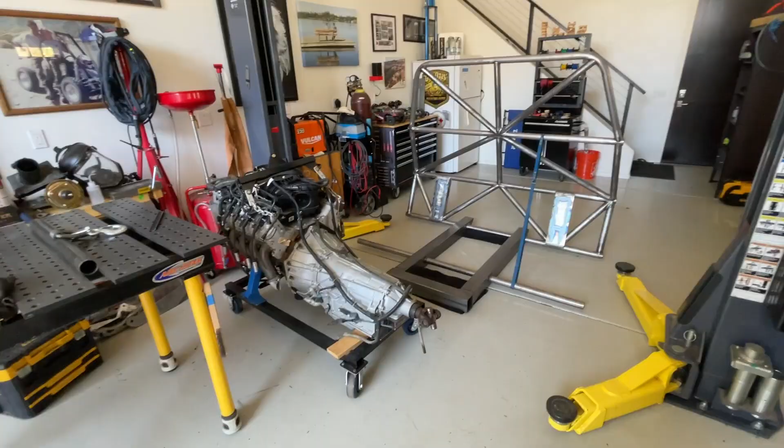All right, where to start with this conversation? I guess we'll just start with first the engine. And the trick, I think a lot of times, is just figuring out how are you gonna lift one of these engines. And so I'm constantly designing different things just to lift the engines. And you'll see in some of our previous videos, I take the exhaust manifolds off and I bolt some plates up to the side, and then these chains mount to the center.

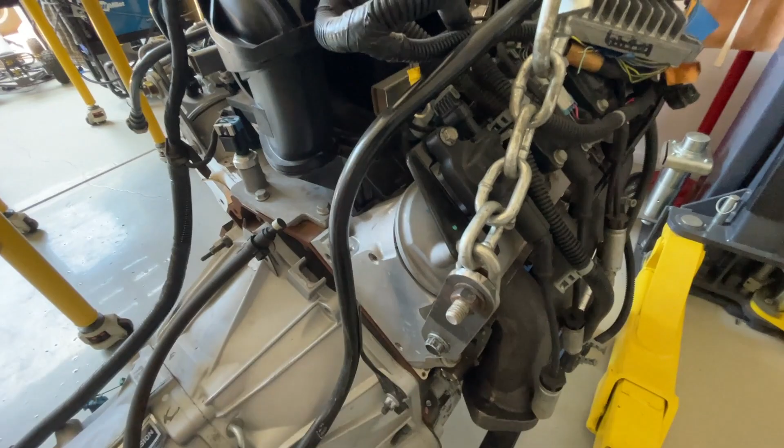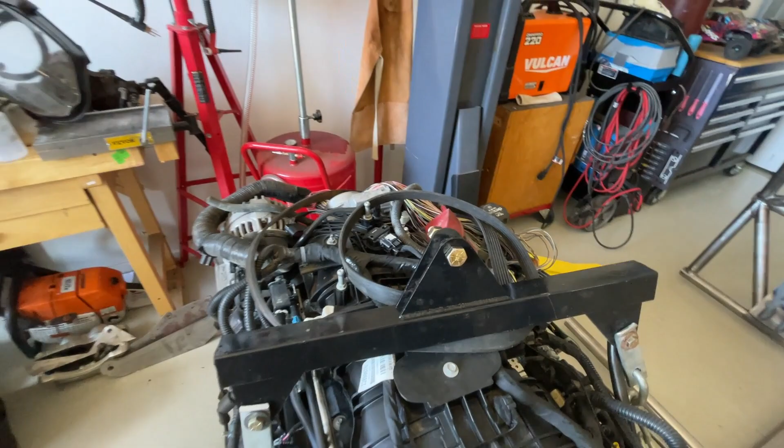But today, I'm trying to leave those exhaust manifolds on to see if I can later on. And then I just got it mounted up a little bit differently with some pieces that I cut off the CrossFire XR. These are 1/4" plate bolted on the sides of the heads. Now, those chains go up to this bar that I made a while ago. And to basically now connect that whole system onto what I'm gonna be using to lift it, which is my lift here, I'm gonna make this bar to go across the arms of the lift.

And these are just some scrap pieces I had in a bin that I'll be using to make that, and there'll be a lift. And this thing will connect onto there to lift the full engine. And I'll use both arms basically to balance and level the engine. You'll kind of see how I do that. I'll be using that to set the engine into the cradle and then dimension everything to make the engine mounts.

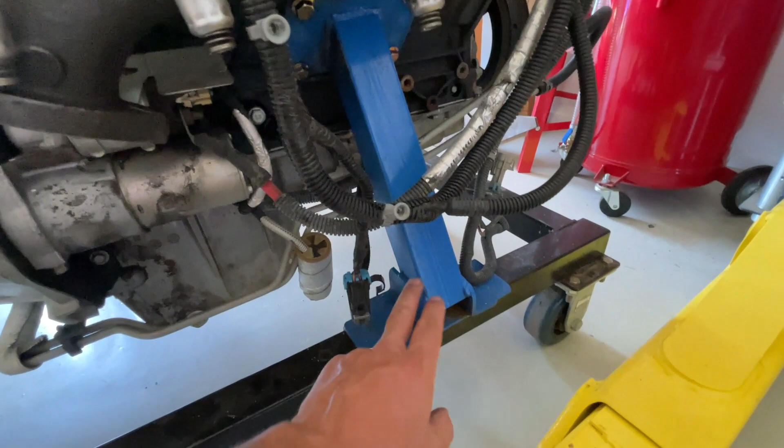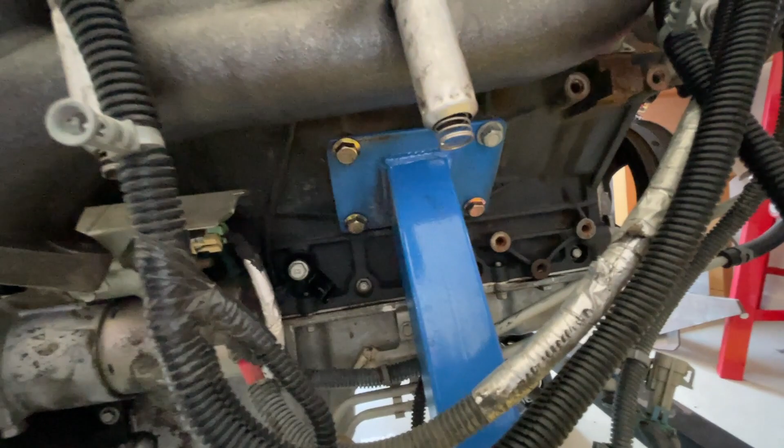Let's take a look at what kind of engine mounts we'll be using. You kind of get a little sneak peek of what we're doing in the rear for the transmission mount. But the engine mount, which we're talking about today, will look kind of like this Frankenstein engine mount right here. It'll come down to the cradle frame, and then it'll go up to bolt to the side of the engine like all LS engines have. And I'm pretty sure that's a pretty standard bolt pattern. I'm gonna pull more accurate dimensions off of that, and we'll make another one of those.

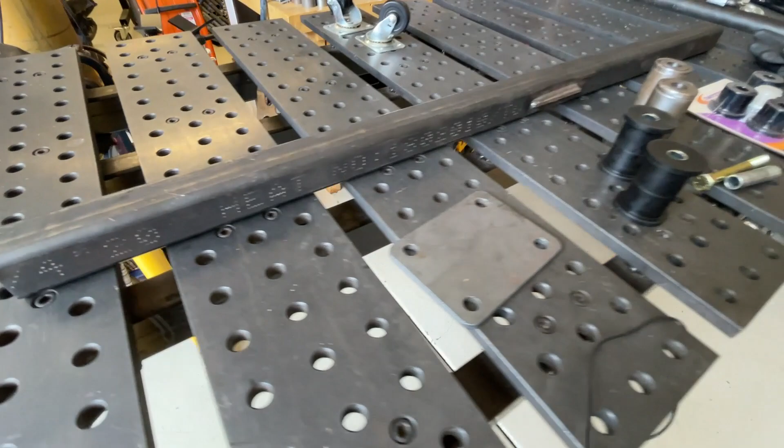But what I find is that a lot of the stresses kind of go on where that plate mounts to the side of the engines. The bolts can take it, but I have sheared off the weld all the way around. I've used a little bit thinner material. This time we're using 1/4" plate, and the upright we're going to be using will be a 2" square with a 1/4" wall. And that'll be pretty robust on the engine side.

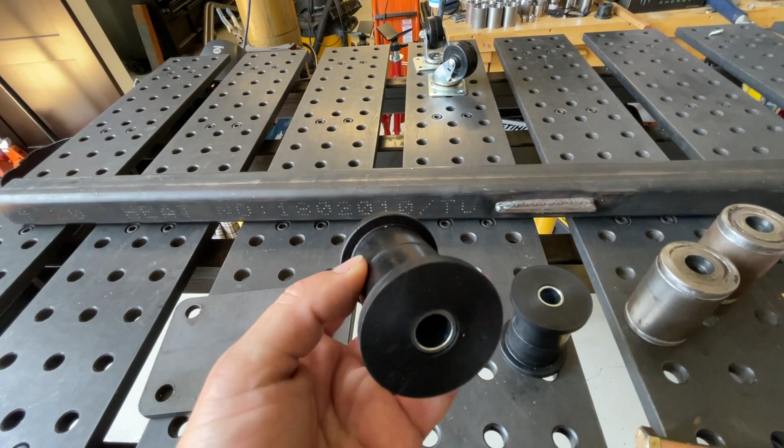And then on the frame side, we're going to be using these bushings. So there'll be a little bit of give, not necessarily as much stress on the frame side. I get these bushings, they're just '67 to '87 shackle bushings from a Suburban. And there's the part number if you're interested in something like that.

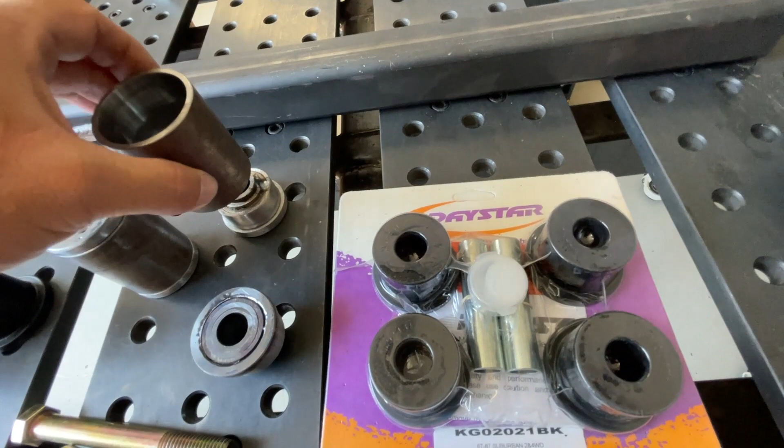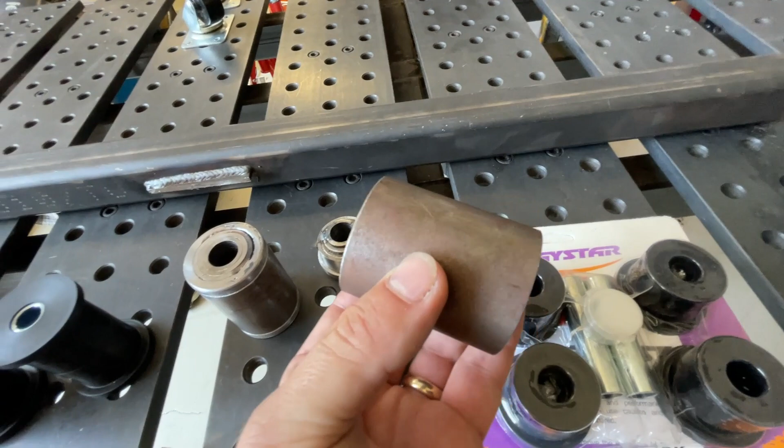And what I like about that is we just continue using the DOM that we use for the rest of the truck, the 2" 120 wall DOM, and that's what those things will sleeve inside. In the past, when I've made these, I kind of put the bushings inside the piece of DOM that I have, and then as I'm welding it, I've got to do some tack welds and then really quickly try to cool that thing down because it'll start melting the rubber that we're using for that.

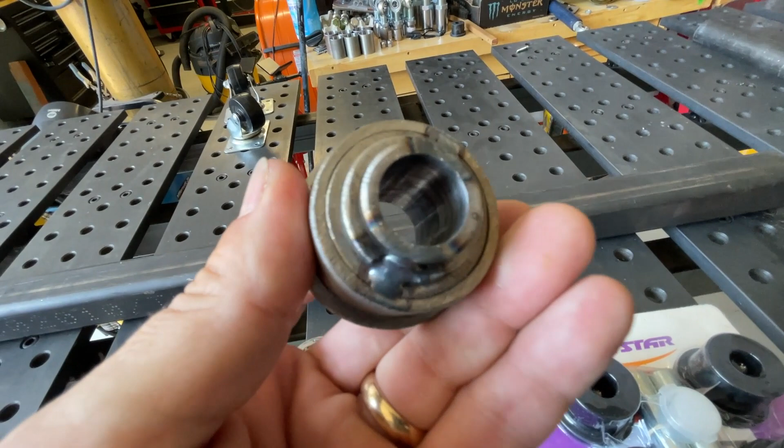So what I made, I don't have a really cool lathe or anything like that, but I had a bunch of extra tubes sitting around, so I was able to make these slugs, I think we call these things, just basically from sleeving tubes inside of each other until I get the right size. And so those go in there, and now when I'm welding, they won't melt.

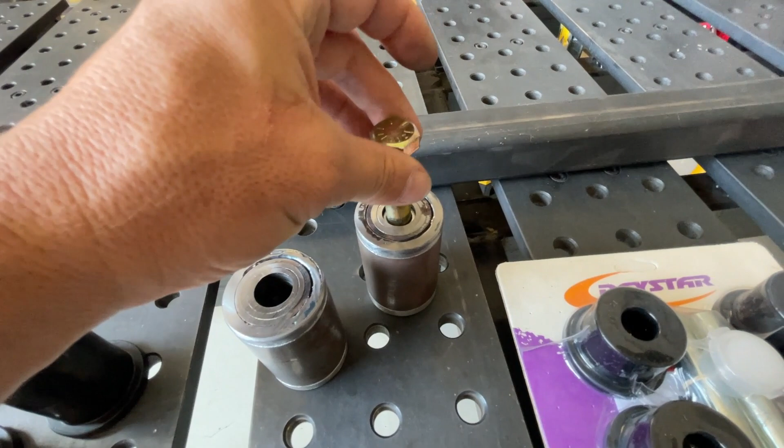And then inside that goes the sleeve, which is this sleeve right here, will go in there, and then I can put my 9/16" bolt all the way through there. And I can basically mock it all together, weld it completely before I take it apart. And that makes that really handy.

So anyway, let's go ahead. I'm gonna put this thing on time lapse and you can see me making that mount and then trying to get this engine into the cradle. Let's get to it.

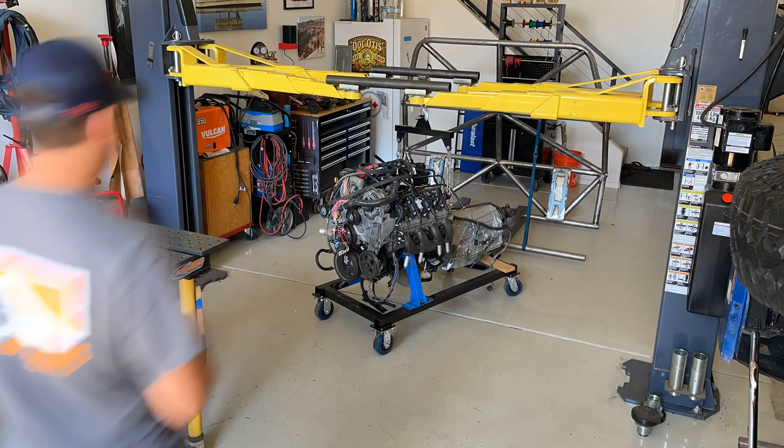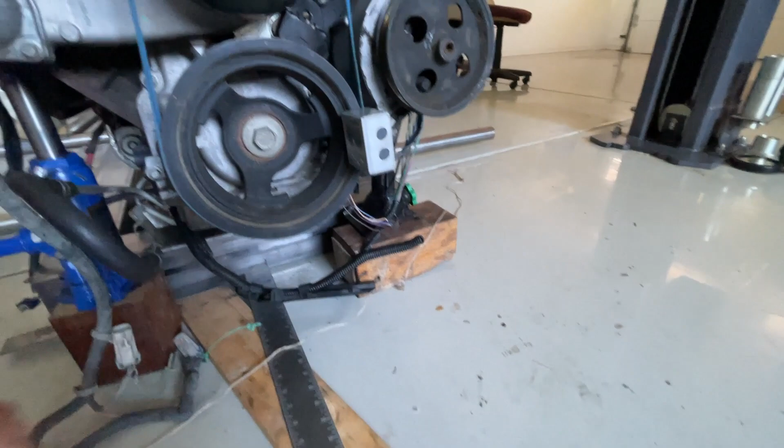All right, here is the engine in the cradle, and I think it went in perfectly, pretty happy with it. Let me show you some of the high-tech tools that I'm using to get it all lined up. So I got this square lined up with the center of the cradle, and basically to align the engine up in the center, I'm just taking the plumb bob off the water pump and through the crank there, and it's lining it up on that, and it's pretty darn close there.

And then as far as getting the engine level left and right, I haven't found really a much better way other than to put my little angle cube back here on the valley cover, and there you go, within 3/10 of a degree. And then as far as front to back longitudinally, kind of 5 degrees is what we use on Honcho, and that's pretty close there to 5 degrees is how much the engine is tilting down at the tail.

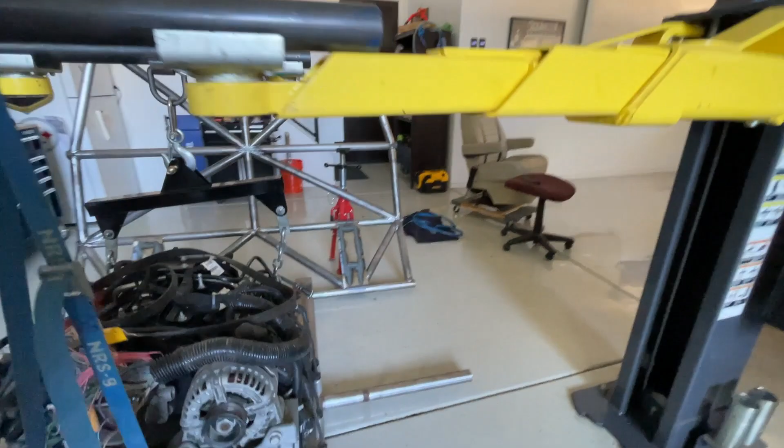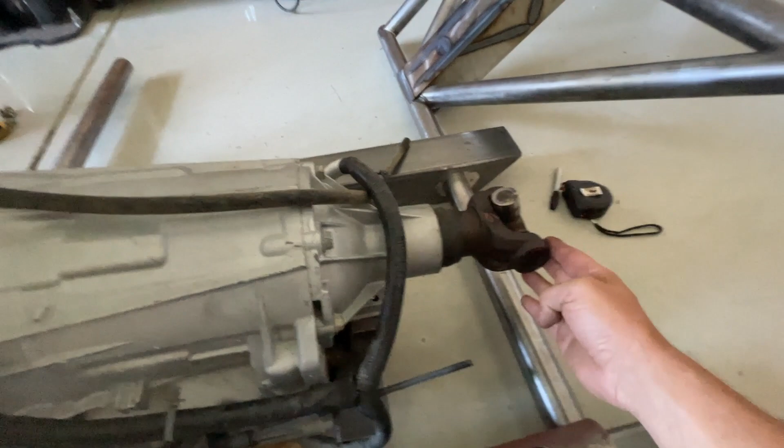Now, why do I do that? The reason I do that is because, people will scoff, but we've raced already twice at the Baja 1000, haven't blown one of these up in Honcho, but we're still using a slip yoke on this thing. And then there's only just so much travel that you get out of these U-joints.

This will not be the one that we use. We're gonna have the guys over at Oceanside Driveline build us a new drive shaft. So these won't be the ones we use, but this is the hardware. This is basically the equipment that we do use. And there's a limit to how many degrees it'll go up and down.

So this will basically allow our drive shaft to go 10 degrees down and then be at the 0 point. Because usually our limiting factor as far as where we strap our suspension in the back is how far these U-joints can handle going down. So anyway, you kind of get an idea of the setup.

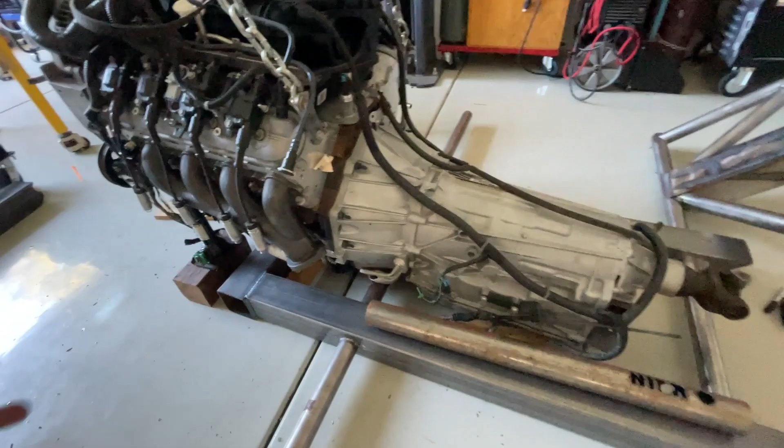What we have here, we're gonna have the exhaust. Where we had it before, we had it kind of coming out and going all around the side of the car. Now we're gonna have it going down and going inside the cradle there. And then the other side, we'll have our coolant lines going down the cradle also with the exhaust. So we'll be dealing with some heat issues.

We'll see, there might be a shield on both sides there for the driver and the passenger, and then also for the transmission, but there's plenty of room in there. I mean, it's a huge vehicle compared to Honcho in every respect. It's got so much more room. So I don't think we're gonna run out of space.

So, all right, now that we have it in there, let's talk about what these engine mounts are gonna look like. First, let's take a look at Honcho's. All right, we're looking underneath Honcho now. And what you see is here's that same 1/4 inch, 2-inch square tube there. Kind of goes all the same hardware.

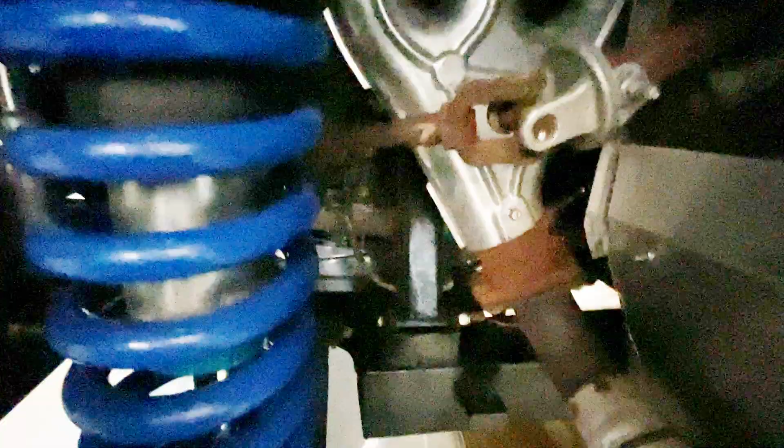But what you'll notice here, which I'm gonna change on this one, is that this perch just really isn't that tall. And what that makes happen is the actual shaft here that becomes the engine mount, I'm not sure what you want to call that, but the actual piece there is long, which means that over a long distance, you can create a lot of moment arm. With that in mind, let's go ahead and take a look at Lefty.

All right, so I bolted that plate in there, and as it turns out, that plate, which I didn't think was gonna fit perfect, it fit perfect. I'm just gonna cut another one of these out on the plasma table and be good with that.

But you can see the distance here is probably 12 inches from that plate to here. And I'm gonna probably bring this up about 4 inches just to make that distance that the rotating piece there of the engine mount has gotta be shorter. And that will reduce the moment arm.

And just like putting in the 1/4 inch plate will be another way to lessen the likelihood of that thing breaking. And then also making a more robust transmission mount is also going to help with that. I think that we will not have any problems with mounting this thing.

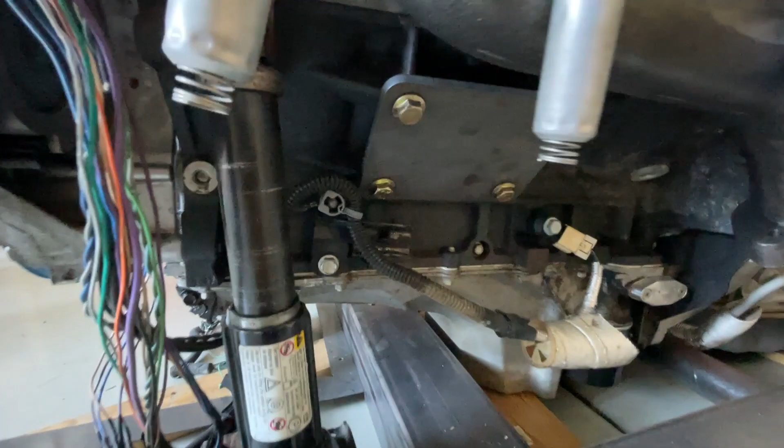So with that, let's go ahead and start building this piece right here, which will be the frame side perch for the engine mount. And then we'll figure out how to connect those things together with some of that 2-inch square tube. Okay, here we go. Dave's brain on Fusion 360. Let's start with some sketching. And big picture, I think I'm going to make the perch about 3 inches above the base is where I'm going to start with. So we'll make the base first, and then we'll make the other parts later on.

So I'm just going to work right off of the center, and I'm going to start with the hole. I'm going to say hotkey C, which will give me a center circle. And the bolt diameter, it's a 9/16, and it's about a 0.55 inch or somewhere in there. So I'm going to go 0.56 inches. All right, and then now how big in the radius around that, I'm going to say hotkey C again, and I'm just going to say this thing's going to be 2 inches.

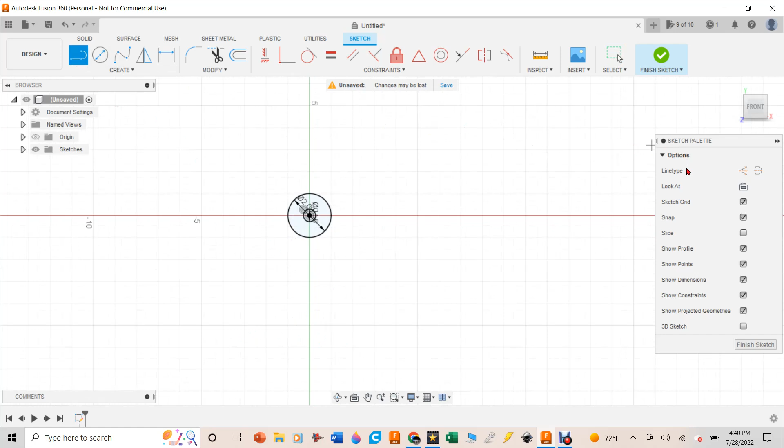That's the same size as the whole thing that's going in there, so it just makes kind of sense to me to do that. It'll also make sure that it always fits in there as I make the other parts here. So from there, the base of it, how wide do we want the base? Well, remember we said we want it 3 inches from the bottom. So I'm going to turn on construction lines. Anytime you use construction lines, it draws a line, but when you go to cut, it's never going to try to cut that line. So we'll say this thing's going to be 3 inches tall.

And then the base, let's just make it no more than any of the dimensions anywhere. 3.5 is kind of like the weldable flat space on any 4x4" tube, which is going on. But I think if we just go with 3, we're not getting excessive. So I'm going to say hotkey L, which gives me a line. I'm going to turn construction lines off, and then I'm going to go over here. I'm going to make a 3-inch line.

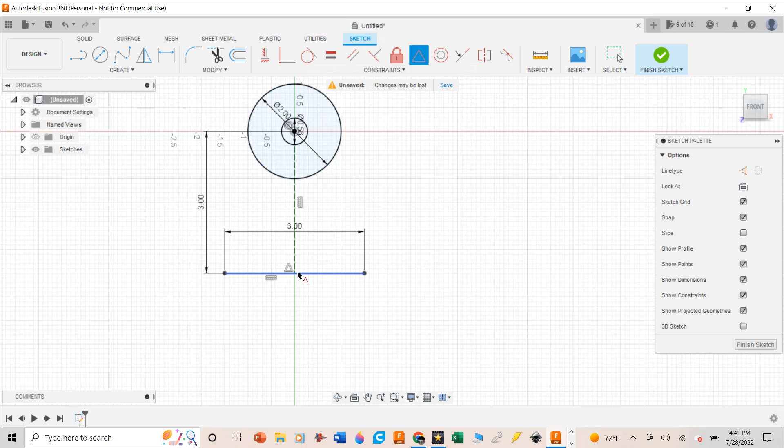And I want it to be centered on that point because I want it to be pretty much symmetrical. So I'm going to say midpoint. I'm going to make that point right there centered on that point. Now that's a constraint that's in there. From there, I'm going to hit hotkey L again. I'm going to go from this point down here until it snaps to where you see that little symbol up there telling you that it's tangential. And then it'll be a smooth arc going in there. Boom. And then from there, I'm going to remove the sides.

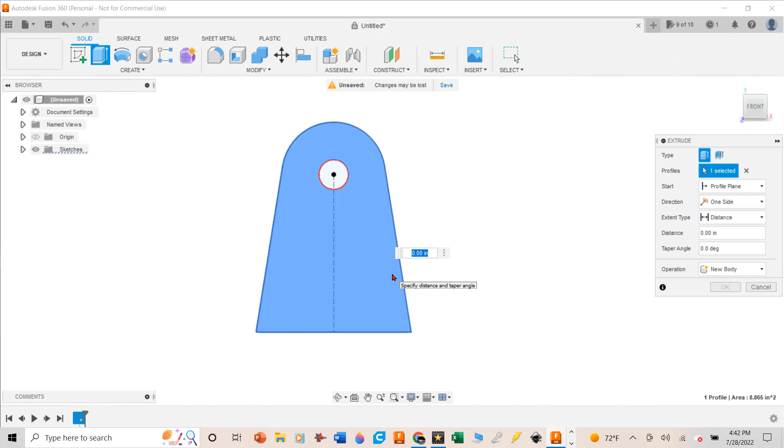And that's the perch. That's where it's going to be mounted to. That's the thing that's going to be sticking up on the side. Now I want to support that, so I'm going to box this thing in. So I'm going to put some plates down the side just as a box. Now, I need to make 2 of these. I'm going to actually extrude this part right now. And say hotkey for extrusion and 0.1875. I think that makes a piece that is 3/16, which we'll be cutting into. So there we go. There's one of those.

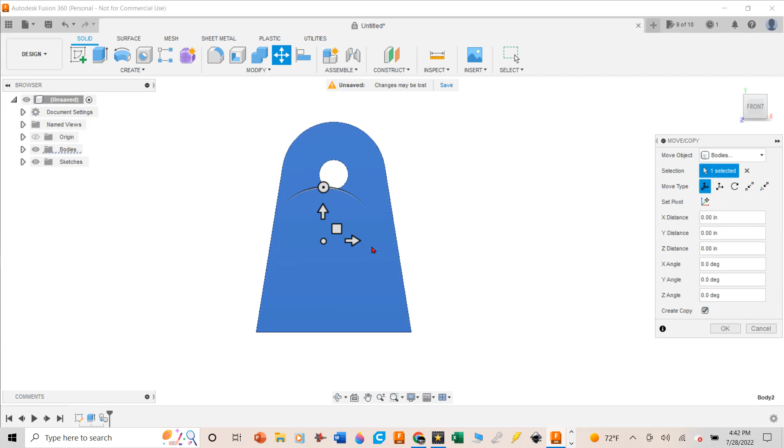And for each side, I need 2. But I will just say move. I'm going to say bodies. Click that. I'm going to create a copy. And I need to make 2 of these. And since I'm going to nest these things later, I might as well start now. Flip it 180 degrees. And then when I go to cut it, I'll just do like that. There we go. Now those 2 pieces are ready to be cut. Now I want to put some plates on the side, like I said, to box this thing in. The full width from inside to inside is 4 inches wide. These plates will go up the side. So I'm going to say sketch.

I'm going to sketch on this plane again. I'm going to use this piece just to kind of measure how long that thing I got to make is. And I don't want to go all the way to the end of the hole just because it will kind of interfere with being able to drop this thing in there. So right about there is probably good. And it'll give you enough structural rigidity, I think, for this thing. It looks like a 2.5 inch.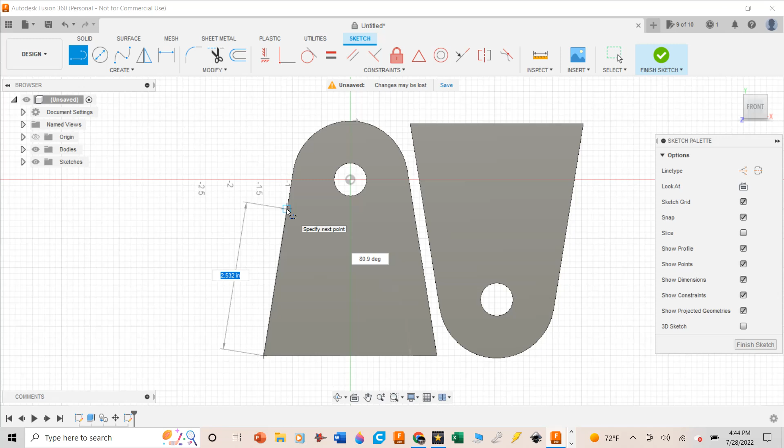So I'm gonna go over here now and make a rectangle. And I'm gonna make that rectangle 2.5 by 4 inches. And let me just make that 2.5 tab 4 just so it makes a little more sense what I'm doing. Now that's the piece that's going to basically weld down the side, and that'll just basically give it some rigidity.

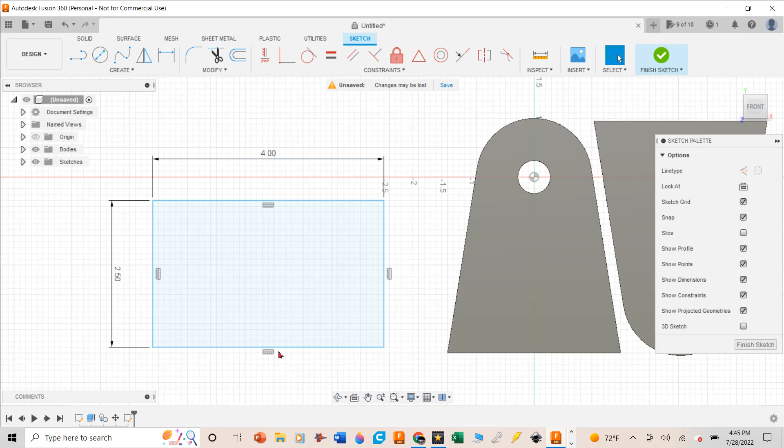But remember, this part is going to be open, so every time you wash, this thing's going to fill up with water. So I kind of need to make a relief right here just so that water can kind of flow out of this thing. So that grabbed the center point, if you could see that. I'll make that a 1-inch circle, and then I'm going to trim all these parts of the circle. And then I can kind of go in here and make a radius on both sides just to kind of soften that up, make it look like you knew what you're doing. And say enter on that.

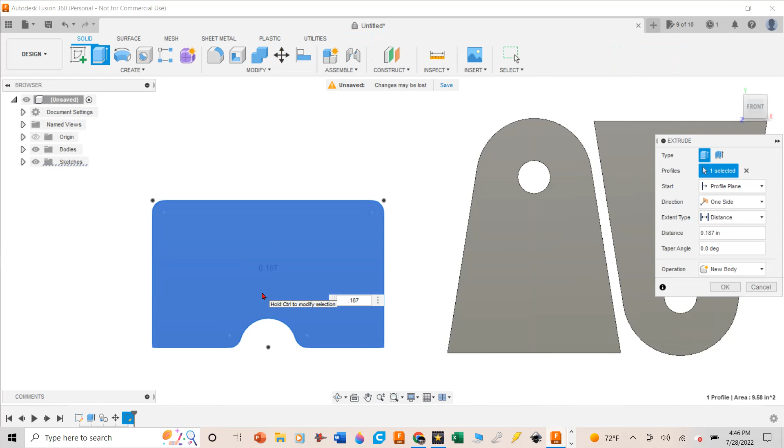And I can probably do also this. These parts will weld down to the base, but I'm going to do, I didn't want to do that. Control Z, I'm going to make a radius there and there. I want that to be, yeah, that looks about right. Just so it looks nice and clean. There, cool. That's how that will look. And I'm going to say enter on those. I'm going to extrude that and extrude that. And that's going to be 0.1875 or 3/16.

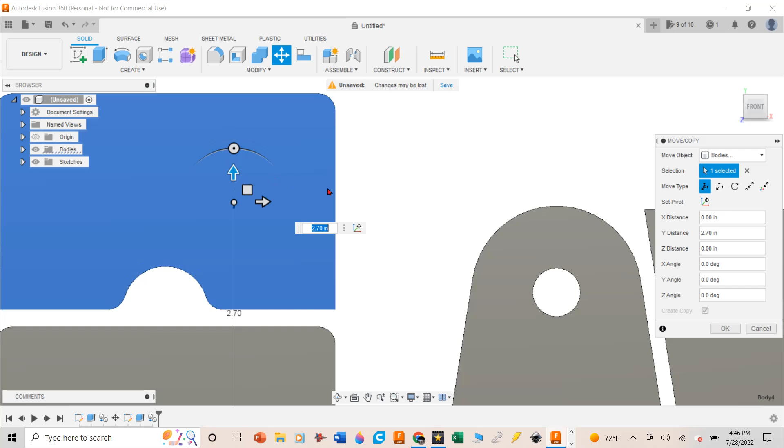And I need to create a copy of that. So I need 2 of these. And it looks like maybe just up here would be just as good. Sometimes you got to scroll in, otherwise it'll be moving by 1/2 inches at a time, and you don't want it to do that because it wastes a lot. So if you scroll in, it'll allow you to move it at a lower increment, if you will. So there we go. All right, so this is like the sides. These are the braces on the front and the back.

And the last piece is, I kind of want to take the place where those 2 4x4s join, and I want to strengthen that a little bit. Then also give these things a base to basically allow me to weld to. So I'm going to make another part right here, and I'm just totally freestyle on this. I'm going to start drawing. And first thing, I'm going to use just some construction lines. So I'm going to turn construction lines on. And the way that mine goes together, if I have a rectangle, and just say that's 4 inches wide by, it doesn't matter how long, this is longitudinally front to back on the car.

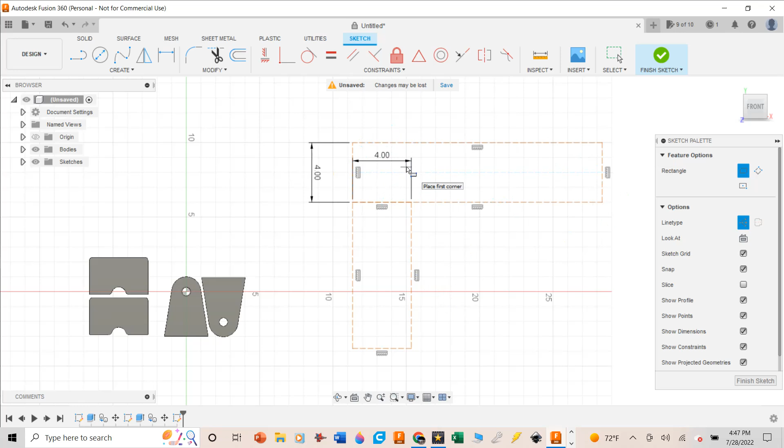And then I'm going to hit hotkey R again. I'm going to start here. And then now it's 4 inches tall, tab, that's going to be 4. And then this is going to be somewhere underneath the engine is where that ends. And that's what this thing's going to look like, as far as this plate over here is going to sit on top of this one. And then now what I want to do is I got to keep everything about a 1/4 inch away from the sides over here. And I can kind of illustrate that.

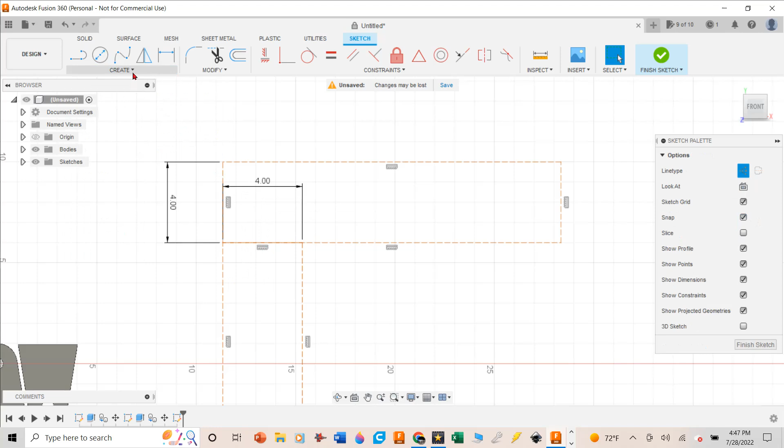I can also go pick a center rectangle again, and then it'll snap to the center point, and I could just, that's not what I wanted. I want a center rectangle. I use this one all the time. I find these really handy. Snaps to the center, and then I could just say that the width is 3.5, and then there it goes about to there. And then maybe that helps me figure out how close I want to draw the next lines.

I could do the same thing over here and say tab 3.5. You just got to kind of keep track of what you want. So I wouldn't want the thing I'm going to make to exceed these lines necessarily, just because this is going to be the area where I'm going to weld around the sides.

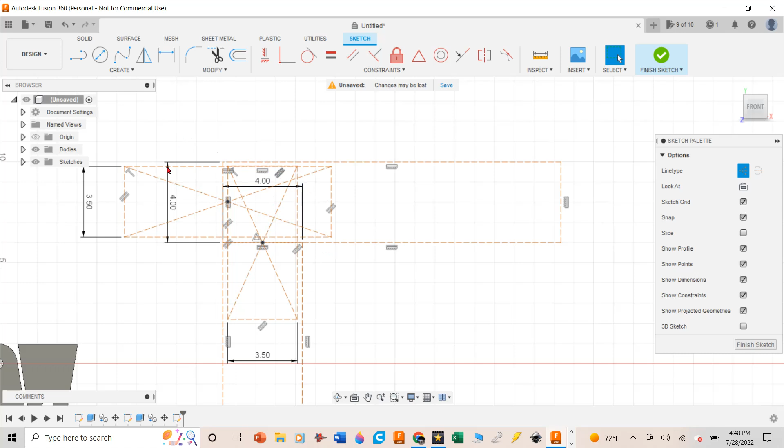I'm also going to give myself some places to do some rosette welds to really strengthen this thing and lock it into the top of these pieces of metal. So I basically want to make kind of like an L bracket. I might have it come all the way down here, give myself a little room to weld to, and then weld from underneath. That'll give me a perch to put this other part.

So we know that this piece right here is going to be 4 inches by about 3 inches, right? So if we take our square and say rectangle, it's going to be probably right about here, give or take. I'm going to say it's going to be in that direction, at 3.5-ish. It actually will end up being by 4.

Now that's going to be like the base of this rectangle, this one right here. It's kind of getting hard to keep track of where they are, so I got to build a plate that is bigger than that. I can come in here and just start making some lines, make it up here, come out to over here, and then maybe come into right about there, across this line. I don't know why I'm doing this, but I need to make these not construction lines, otherwise it'll never cut them.

Making this big enough over here will give me some room to move that piece around. This will be a little bit of space to weld across on the top. I'll get a good weld all across here, and then all the way over to there. Now you can kind of see this plate right here represents the engine mount, and I can move it all around here once I get this other plate on top.

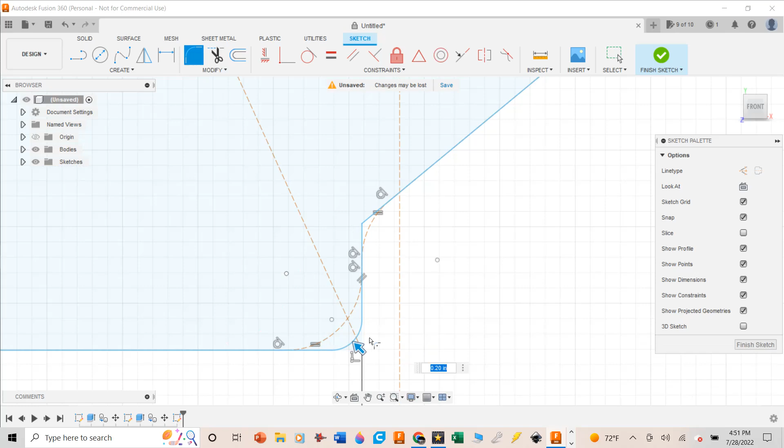Once I got this, we can just try to make it look like we knew what we were doing, which half the time I can't say I do, I'm just making it up. We can just kind of soften all the lines. I don't want that. I want to grab this, grab that. No, not that line. All right.

So I have that there, and now what I can do, if I want to, is put some circles in here that I can rosette weld, just to really tie these things together real well.

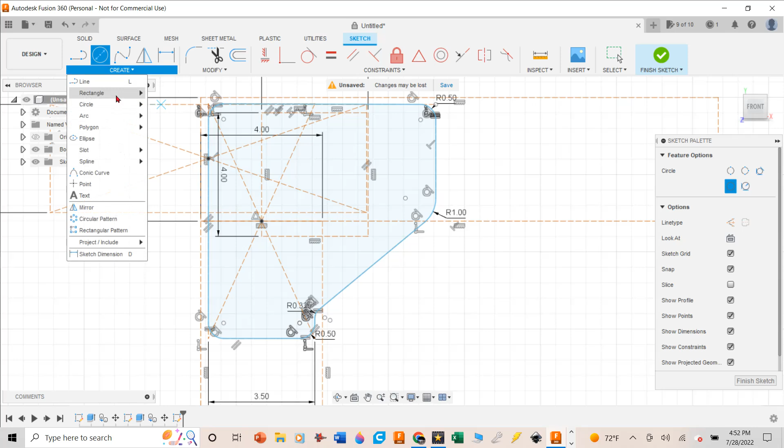For lack of a better plan, try to make it look good, I guess. I can go. You're going to do it. Might as well do it right. Center rectangle, I'll go from the center here. Escape.

All right, that should tie everything together. I got a weld down there, and I got a couple of rosettes. That's going to make a really strong corner there.

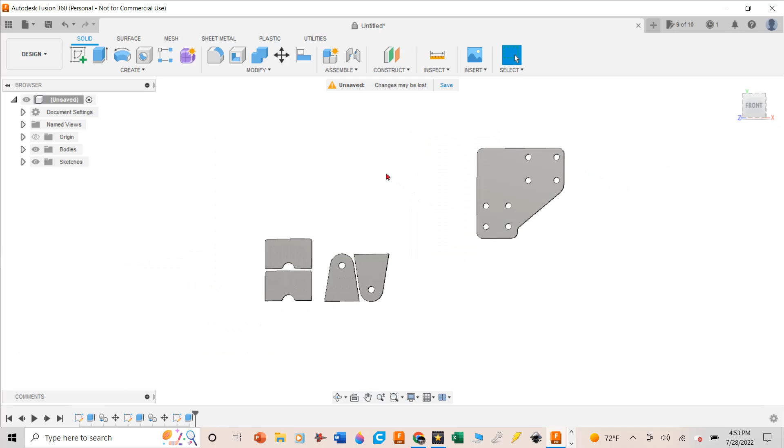I'm going to hit hotkey E, I'm going to grab this thing, it all looks the way I want it to look. 0.18875 — I don't know, that might not be what 3/16 is. It really doesn't matter at the end of the day.

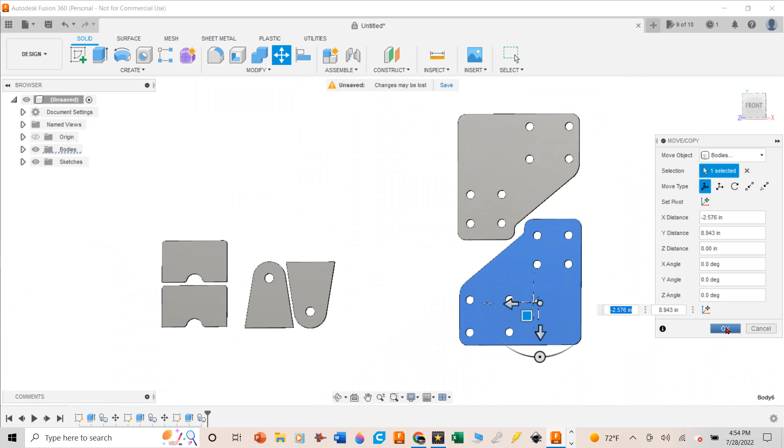All right, so there's that corner piece. So I'm going to cut all these pieces out. I'm going to move this one and make a copy, rotate it again 180, and I'll just put it right here. Looks like the best way to nest that.

All right, now we can go ahead and manufacture. So these things, I'm going to make into 3 separate files when I go to manufacture, so I can move them around and see pieces I have left on the sheet. But this is, I think, a pretty good way to nest these things.

I'm going to go to setup, I'm going to say select. I'm only going to select the pieces that I want to cut in my first setup, and I will call these supports — support plates. Okay, and now I'm going to go to the cutting.

So I use the Razor Weld 45, and I love the thing. I've been using it for like, I guess, 2 years now. That's how long I've been using Razor Weld 45s. And I said for a long time, as soon as I am let down by the Razor Weld 45, I'm going to get a Hypertherm.

Never happened. So I'm going to do a lead in, let's call it 45, and let's do a lead out — making numbers up here — 65. I want it to go lead in slow, cut at 55 inches per minute, and whip itself out at about 65. I think that should work out pretty good.

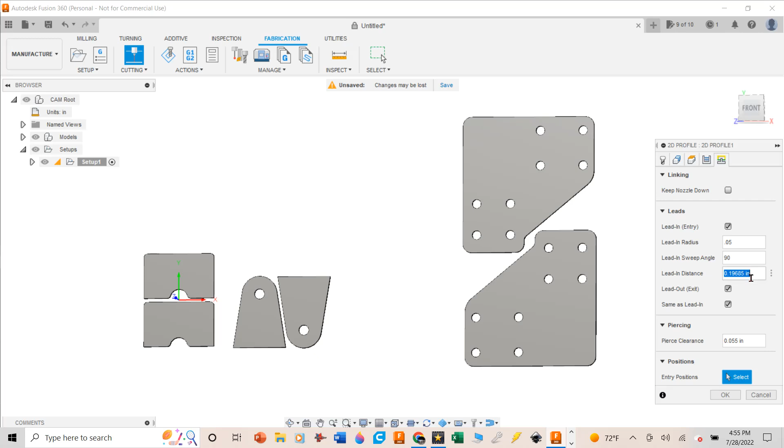So from there, I'm going to pick the pieces that I want to cut, going all the way down to the end. For the lead-in radius, 0.05 seems like it's been working pretty good on 1/8 inch steel. I'm going to come in at a 90-degree angle for the cut. As far as the lead-in distance, in general you want to make that as long as you can, because you want the torch totally established in cutting before it hits the part. Almost 1/4 inch is probably going to be good enough.

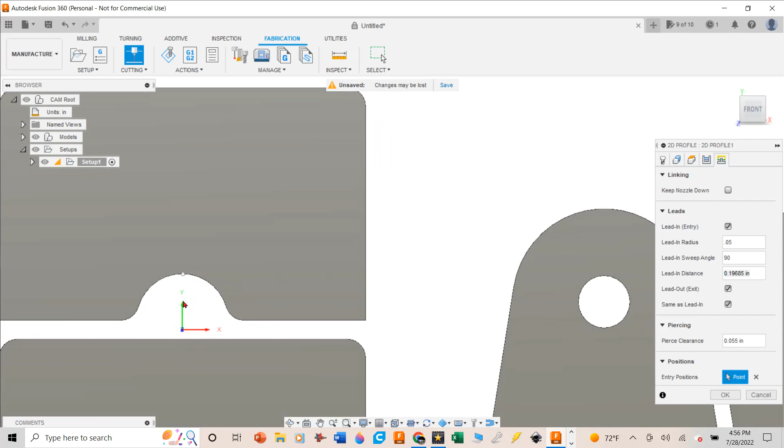As far as where I'm going to cut these things, it depends on what I'm doing. Since these are kind of like corners up here, I might do it there, but this piece down here really just doesn't matter, right? This is just where water is going to exit, and I don't care if it gets a little nick there. I'm going to make sure I'm cutting on this edge, I'll do it right here, because that'll make the torch fire here, go in and start cutting. All this is wasted material anyway, so I won't be wasting more material in there. So this piece, I don't care if there's a nick on it. I'm going to say okay to that.

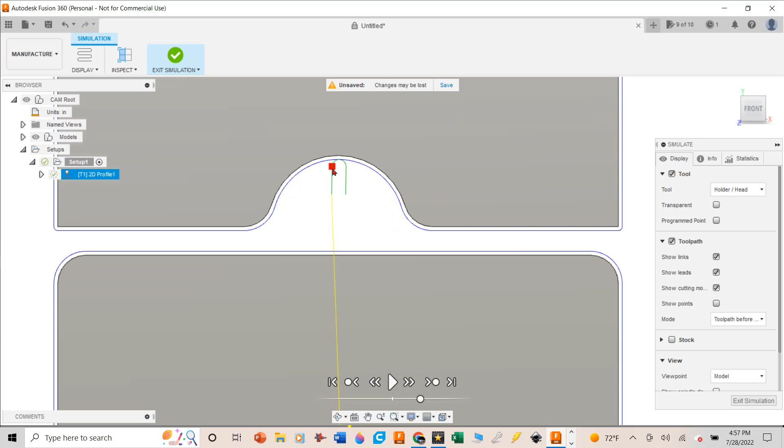Cool, and there's the tool path it generated. I can go to simulation if you're interested in seeing how this is going to cut it out, and watch how the plasma cutter is going to do its thing. You can also zoom in and see your lead-in and lead-out. That information can be useful because maybe your lead-in and lead-out are too close to something else — like maybe it leads in right here, follows this contour, and burns this part 2 or 3 times as it leads in and out. I've had that happen before, but this seems pretty reasonable and it's also in an inconsequential location, so I think that's a good file there.

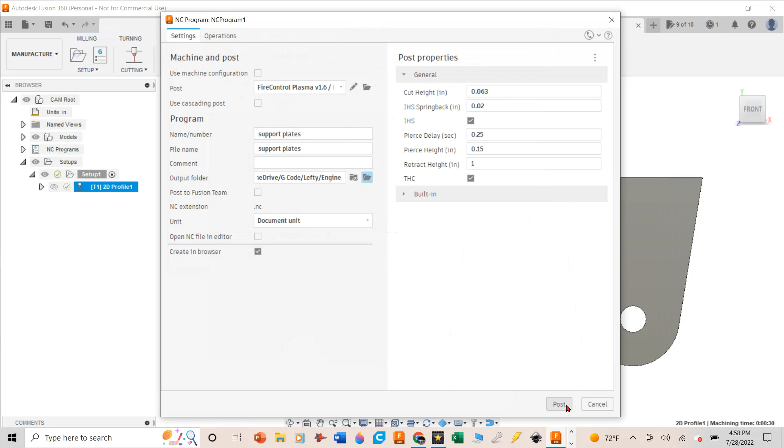So let's go ahead. Oh wow, they changed that up. Let's go ahead now and post the G-code. All right, hit post, and then we'll do the same thing for the other parts.

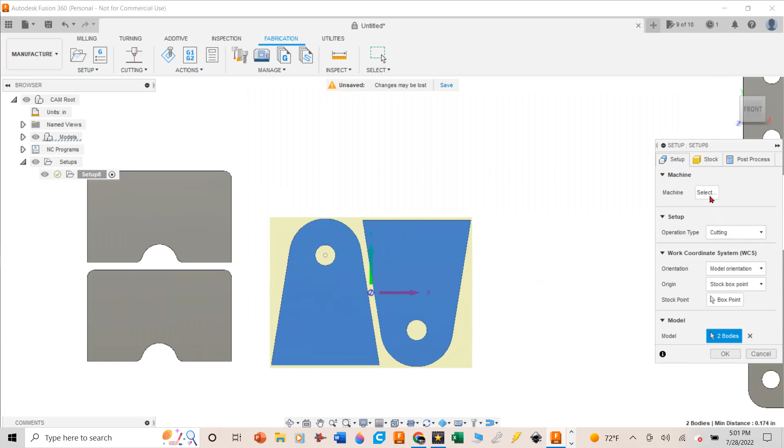As I create a new setup, I'm not sure why it does this, but it doesn't let me deselect these — if there's somebody out there, this is something new they changed on Fusion 360. If somebody knows how to fix this, please let me know. My only workaround is to get out of the setup mode and then completely delete the setup, and by deleting it I can go back and redo a whole new setup. The problem is it makes you redo the whole tool all over again, so that's a little bit of a bummer.

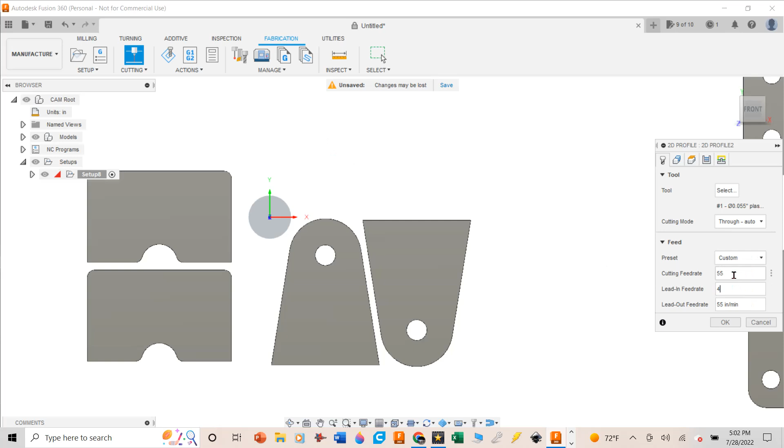Anyway, I'll go get the box point. I always start at the top left, work my way to the bottom right, and we'll call these the tabs. You'll kind of see as I go into cutting, you've got to pick your tool all over again. Here's another thing I don't know how to do — if somebody knows, is to make it so for the Razor Weld 45 I can just click on Razor Weld 45 for 1/8 inch, or Razor Weld 45 for 3/16, instead of having to go in and put in the values every single time, like 45, 65, because sometimes I can't remember what values I used.

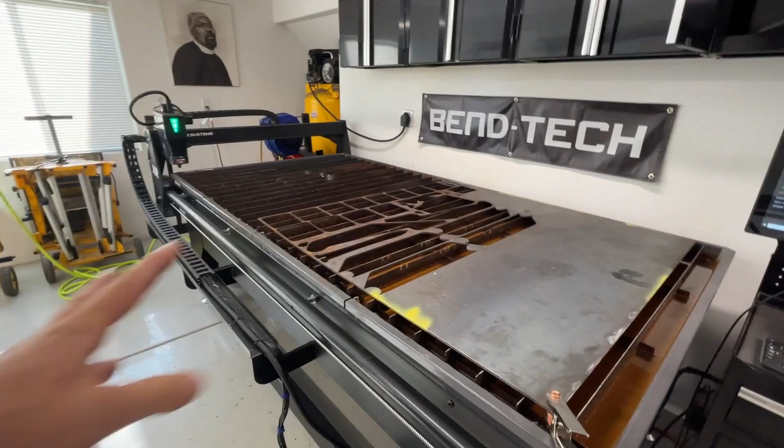All right, all that looks good, we got all those parts in there. Let's take them down to the CrossFire XR and cut some parts out.

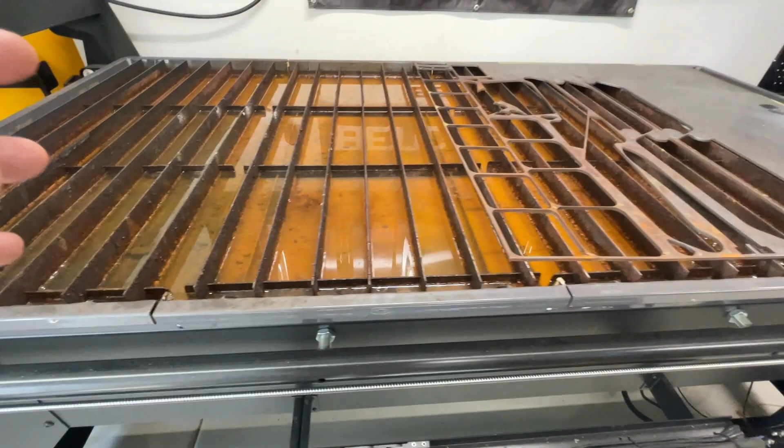Okay, before we get started cutting on the CrossFire XR, I'm going to answer some of the questions I get all the time. Just yesterday I was asked, do I use water or mix anything in with my water table? I use straight water. I know it looks like a mess right now, but I actually put this in over a week ago, and I went on a trip — I was gone for 5 days.

So this water has been in here a couple days, so I'm draining it after this one. How is the water table doing? I have no leaks whatsoever.

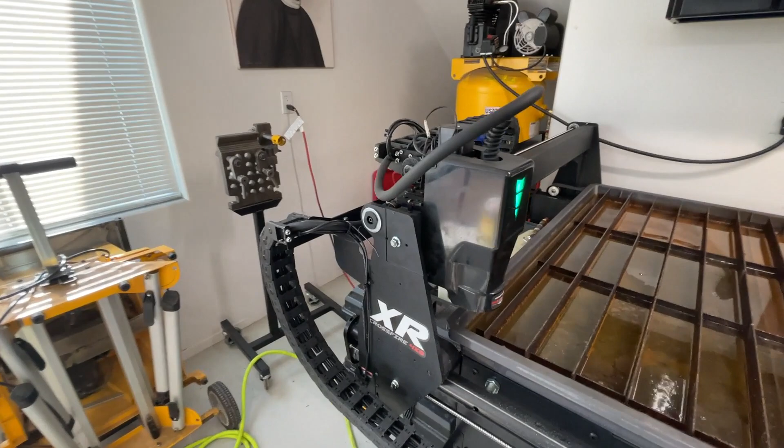If you saw my video about the modifications I did on my table, I put the water lines underneath and run them out, and you can see that makes it really easy to drain this table. I've got no leaks. You can see underneath there, there's been no leaks. It's been on there, water's been in there for over a week now. No leaks coming out.

How do I like the table? I love this table. It has been working great for me. I've had no problems. I don't see any wear issues or anything else that gives me any kind of concern. Everything is working out really good.

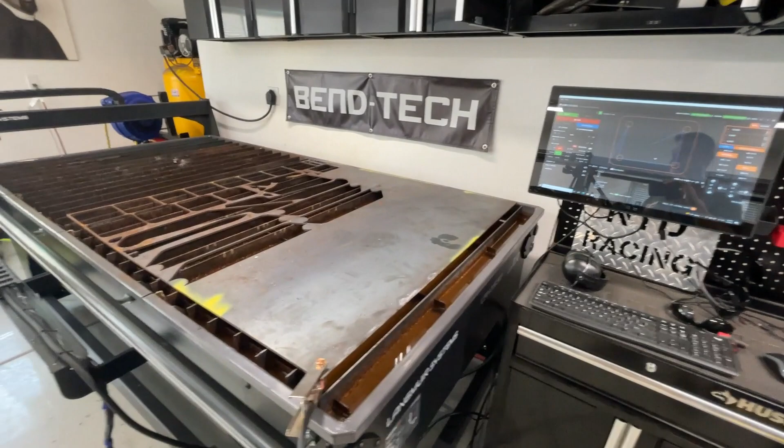What did that translate into for me? Basically, it paid for the shocks for our new truck, is what I've gotten as an affiliate out of that. But not a single person has written me and said, hey dude, I bought the table based off your recommendation and I hate it, I want my money back. There might be somebody out there like that, but in general, if you just put the table together the way that it says, and don't try to be too creative, it works. It is just a really good table, and I haven't had any problems with it at all, besides maybe every now and again having to reset the computer. But besides that, it works, and it's just a really great table.

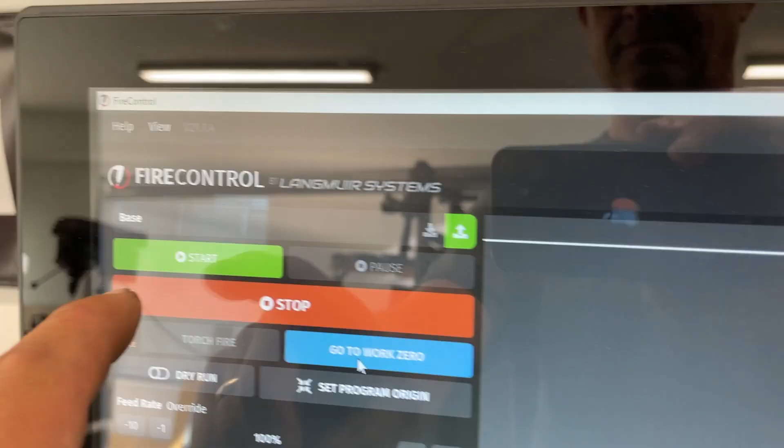Let's go ahead. I'm gonna start by cutting some 1/4 inch plate, and then we'll get the 3/16 up here, and we'll cut some 3/16, and let's check out the cut quality and see how it does.

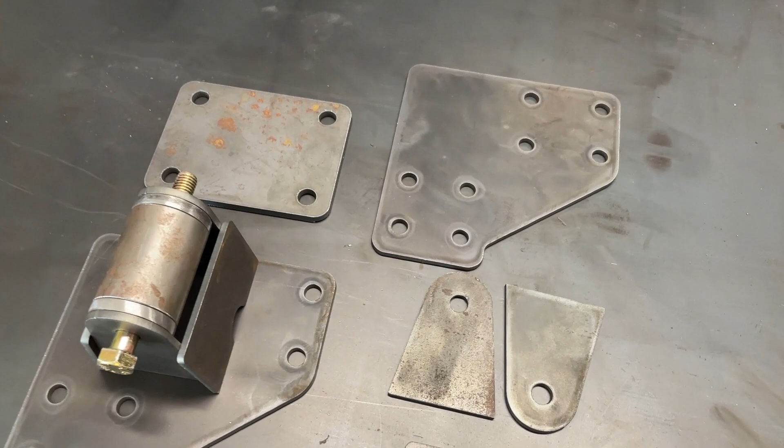All right, these things came out great. And this is how it's all going to go together. You can kind of see what that structure is going to look like now in there, and the engine mount's going to come straight off of here.

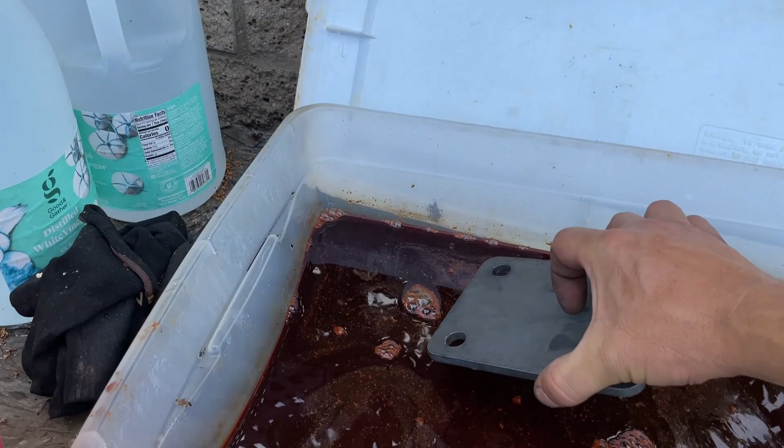Besides that, how else do you do this? How do you make these parts so cleanly and so accurately, so quick? I've always been impressed with this table. Let me show you what I do to prep these things to TIG weld.

All right, I've been using the same vinegar for months now, and this stuff is just so nasty. So right now I have the lid off, I'm letting it evaporate off. But besides that, this is what I do to get things ready to TIG weld.

This might sound like a big commercial, but you see how easily the mill scale comes off after about 4 or 5 hours in the vinegar bath. This is me using a wire brush.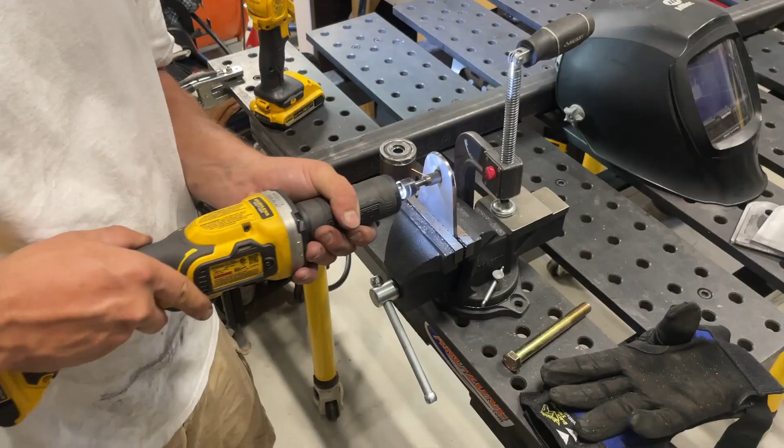So right here, I'm using my angle grinder with, I think, a really cool tool by 3M, called a bristle brush. I use this to get rid of all the rest of the stuff and make it really super shiny metal. It just takes a couple seconds with the bristle brush after the vinegar bath.

And that thing is on there, and it lasts so much longer than a flap disc and those kinds of things, as long as you're careful with it. This is me using my die grinder to basically open up the holes a little bit. Another great tool by DeWalt. Everything I have that's DeWalt is just amazing.

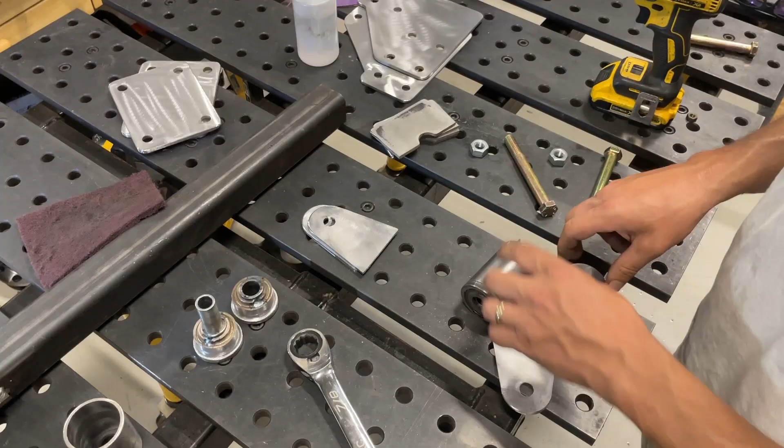And then also right here is my belt sander. Any part that your hand might touch, I usually round it off and soften those corners up. And anything I'm going to weld or TIG weld, I square the corners off. Besides that, I love getting all these nice, super clean parts now and starting to assemble them and get them ready to weld. So here's me doing a little bit of TIG welding.

All right, so I got these mounts located in here. They're just kind of free floating in here, and I'm lining it all up. What I did is I found the difference, the angle from this plate to here is about 22 degrees, and then the distance from the center here to the plate is 6 inches. So now I'm gonna transfer that over to the piece of steel that I'm gonna cut.

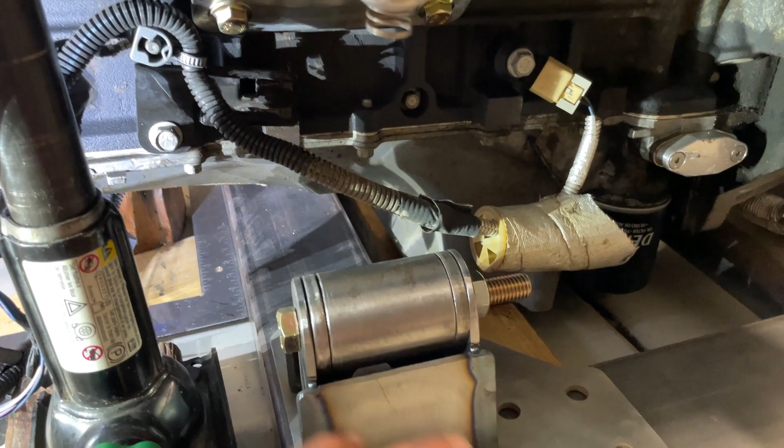I'm gonna leave these things kind of floating because what we'll do is we'll line them all up, and these may twist a little bit because remember the engine is canted 5 degrees back. So to line everything up, we might have to rotate these mounts in relation up here. So I won't actually tack those things up until like the very end.

Looking at this square tube though, you can see here is the radius that will be where one of these tubes will be over here. And then 6 inches to that 22-degree cut right there, and then the other radius. So I'm gonna make 2 of these right now. They'll be the exact same pieces.

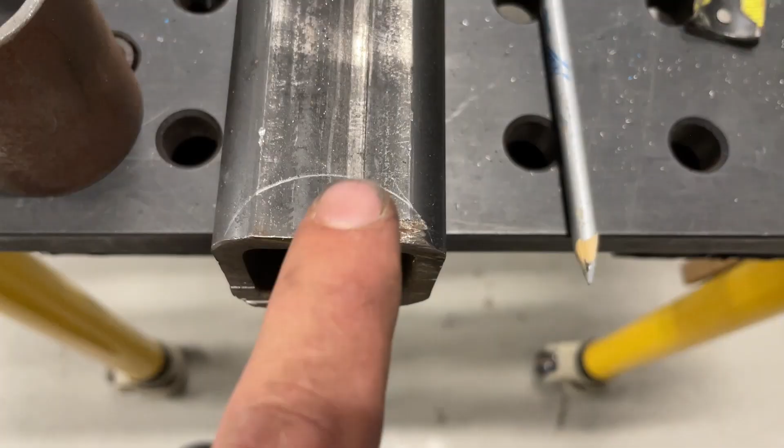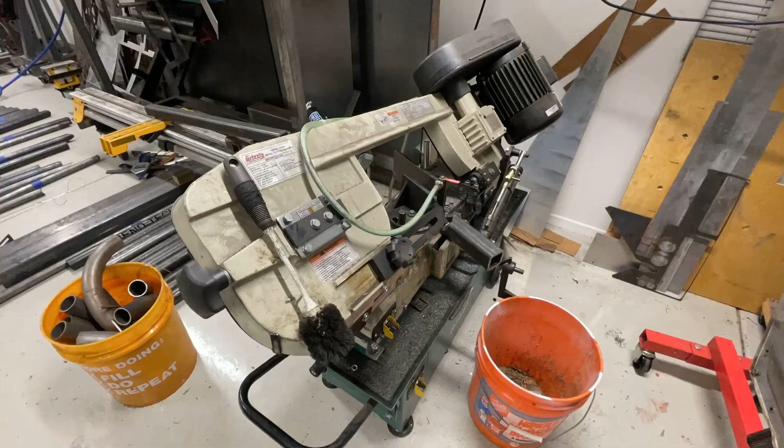And why does this not go all the way to the end? Because when you put this thing up on there, and you go to weld it, it gives you a piece to weld to. And if you made it all the way, then you have a little sliver right there. As I go in with my tube notcher, it's gonna leave a little lip right there. It's gonna give me a thick piece to weld to right here. So all the way around, I'll be able to get a really solid weld to this tube. Let's go ahead and get this thing cut out.

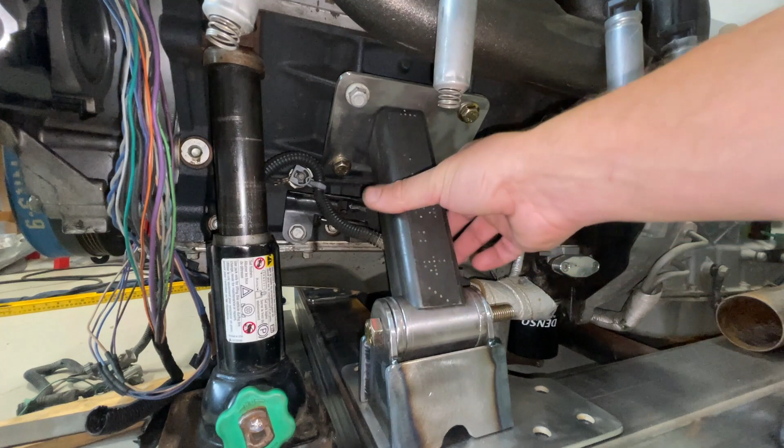All right, let's fit it in there. Let's see how it goes. Lines right up. First off, pretty close on the first try. Now what I can do is I can kind of rotate the plate left and right, and then maybe in and out, just until I get the best flush fit over here to the plate that's on the engine.

Once I've got that, and I'm pretty happy with the location, everything's centered up, and it's exactly where I want it, I'm gonna go ahead and take this tube right here. I'm gonna completely clean it up, get it ready to weld, and get this piece ready to weld. I will put some good tacks all the way around on these pieces. I'm gonna pull this whole thing out. We'll go ahead and finish weld this whole part right here, the mount, and then we'll put it back in, and then we're gonna put some good welds down here on this base plate,

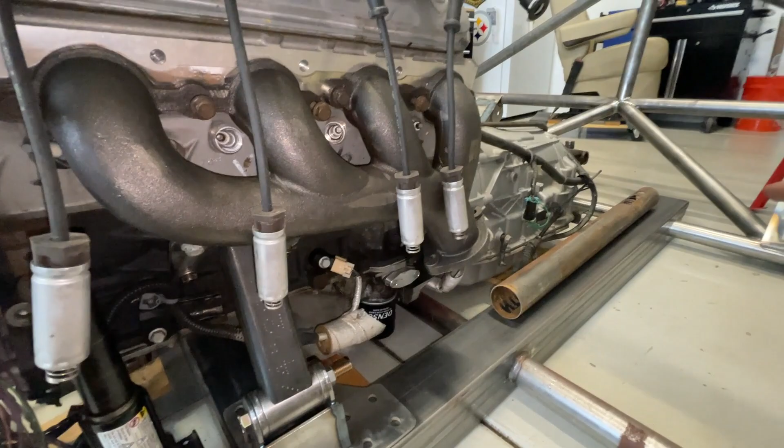some good tack welds. I'll just tack weld it here because later on I'm gonna pull that engine out. I'm gonna raise this thing up to somewhere where I can be really comfortable and put some really good welds on this thing also, and finish up all the rosette welds and all the edge welds and all those kinds of things. So we will do that later once the engine is out and no longer in our way. But what we're gonna do next in the next video is start tackling this transmission mount.

All right, well, I'm really happy with the way the engine mounts went in.